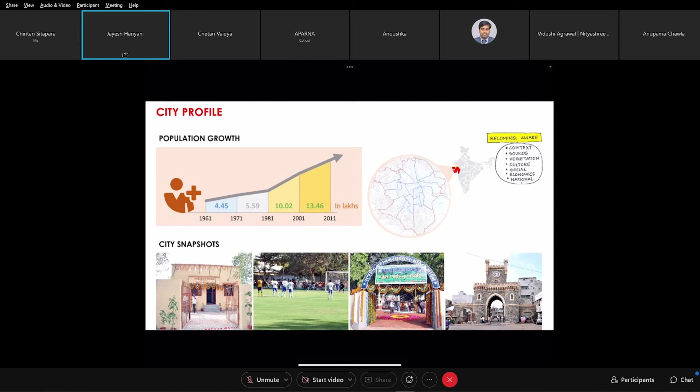Population. So part of the seeking is that you really want to understand a lot of things about the city, people, surrounding, infrastructure, culture, the history, background, and so forth. I won't really describe everything, but the population growth and becoming aware of the context, as I said from my diagram, city profile, becoming aware of all of the physical side and social side of the city as the current situation

that the city offers. I won't read everything, but I think most of you with a planning background go through this discovery or research prior to going into the planning process. So solid waste, wastewater, safety issues, open space, employment generation, energy consumption, slum and affordable housing, cultural aspects, and transport and healthcare, and so forth.

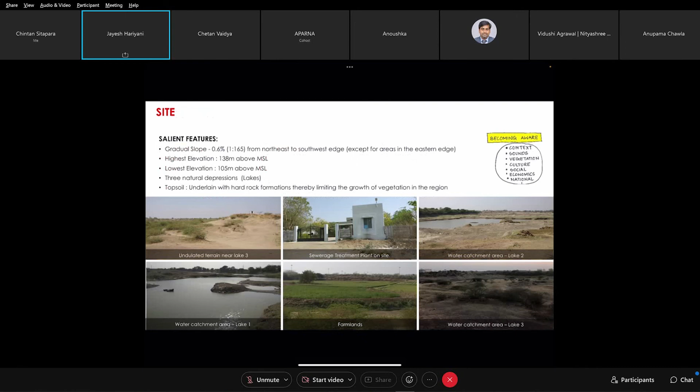Some of the salient features of the site: a relatively very flat site. I'm talking about the ABD area that was offered. Now, in terms of the urban growth throughout the years, mapping those from 1991 to the current date, and in terms of population, working population, household size, and literacy rate, and so forth. So the process of seeking continues as the starting point.

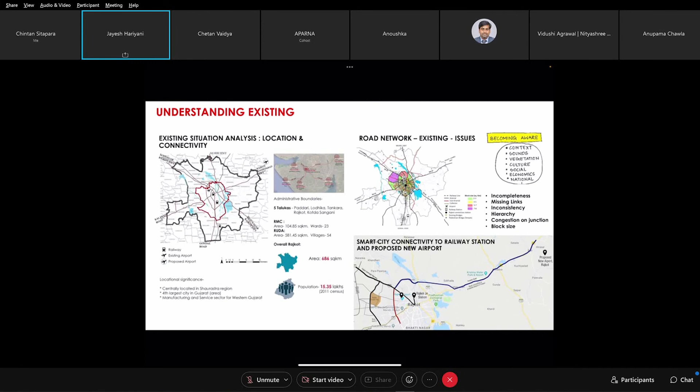Understanding of existing in terms of the road network, what issues are there, what the bottlenecks are, area of the city, and how it really grows into which direction, and so forth. So this continues, as I said, understanding of existing, a lot of that. And then once you start looking at all this data, it helps you to understand the framework, what happened and why it happened and where it's going and why it's going, and whether it's right or there needs to be some alignment to steer it in the right direction.

So looking at the network, whether it's a transportation network or a green network, you then start thinking about what potential it can have, look at different options and iterations and scenarios, fast forward scenarios. So we start parallelly towards the end of the seeking process.

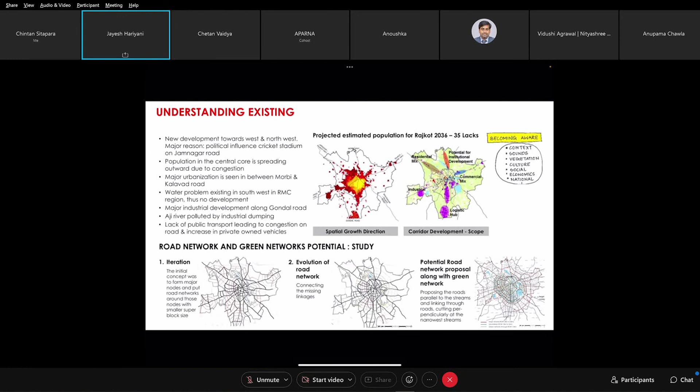Then the city already has a development plan, so you look at what goes in and why it was done and so forth, and in the context of fast forward for the city, in terms of the current GDCR and how they are really helping or not helping or need tweaking. So you look at a lot of these aspects parallel to site analysis. And I'll talk in more detail about why this site and what went into it.

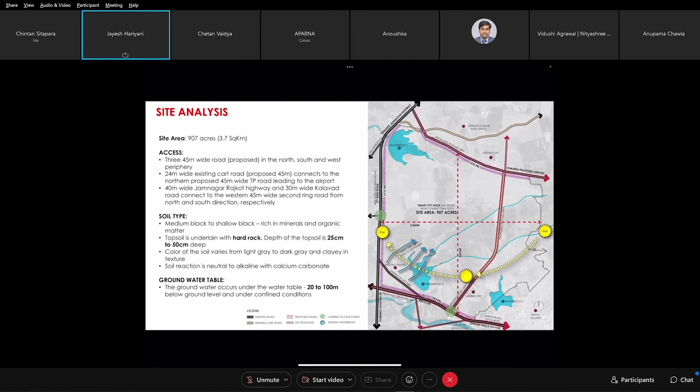So some physical aspects of access to the site: as you can see, the 45-meter road, which is a second ring road. Along this ring road, this site was selected, and soil types and groundwater tables and so forth.

Then we start the stakeholders process and citizens engagement. Total participation in this engagement was about 9 lakh out of the total population. So 70% of the total population participated in the engagement of framing what their smart city aspirations are. In this, a lot of programs and events were organized in terms of citizens' participation, in terms of inclusion, deliberation, refinement, and feedback loop.

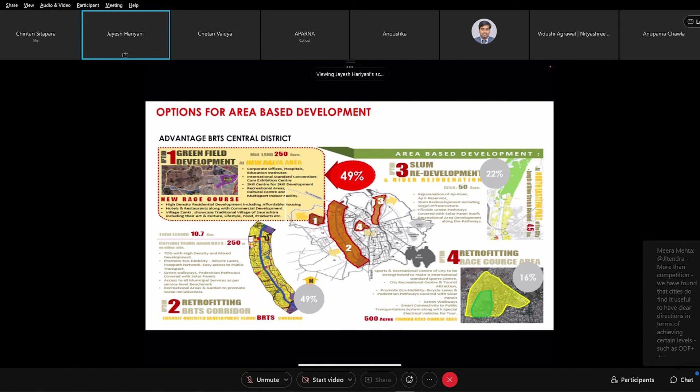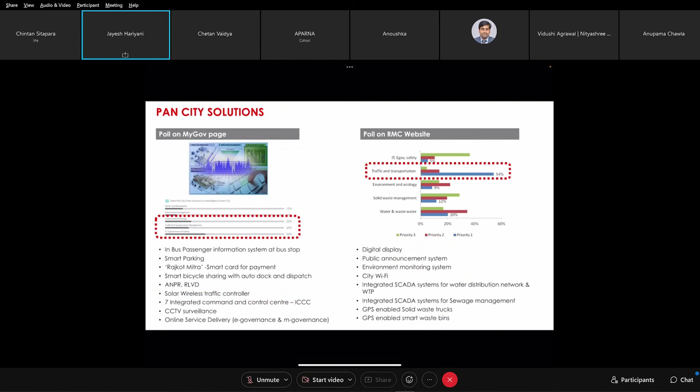And during the poll, the highest voting was the city wants to really go about area-based development. So that was the sure outcome, that maximum vote was given to the greenfield development, while some of the pan city initiative, some of the pan city focus area, was also happening. So both things had to go in parallel.

Today, I'm going to focus quickly on a case study of the area-based development, and how do we really leverage current BRT investment and extend it to the ABD area as part of the smart city initiative. So, looking at the regional level, more economic and social impact, how ABD development could contribute to the affordable housing, reinforcing the city's positioning at regional level in terms of recreation and tourism and sports was the aspiration. Then traffic decongestion, as well as grow the business and industry and offer new employment opportunities.

So four areas, as I said, for the ABD district, and design considerations were coming straight out from the citizen consultation, and what design strategies would guide this entire smart city master plan. Site, as I said, and the planning themes were regional level recreation and tourism nodes, and space for organized economic activities with business park and convention and exhibition center.

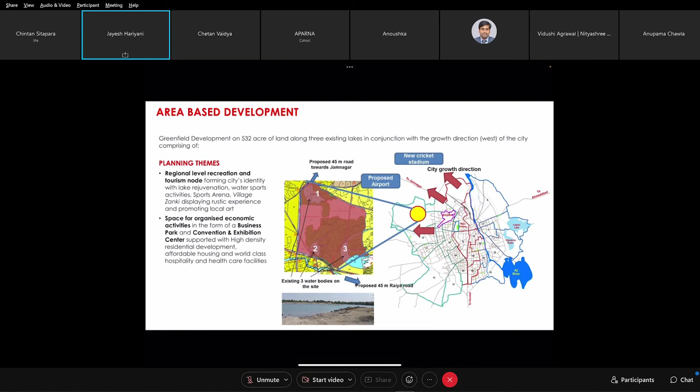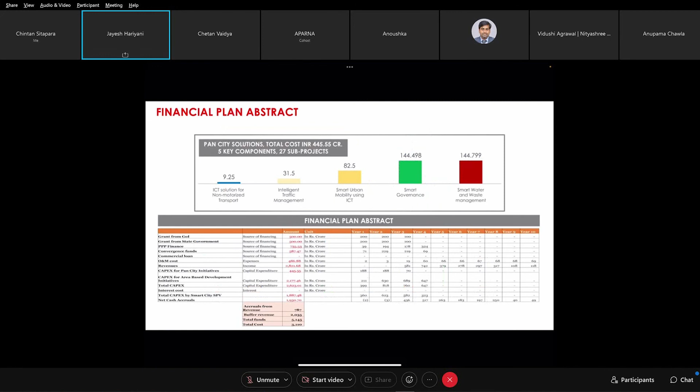Then we worked on SPV, which is already established, the initial funding and financial requirements for the stage one implementation. Overall, about 2,600 crores of total project funding was planned, and how to really acquire those funds in terms of center contribution, state contribution, ULBs, convergence, and PPP and infra development income. So from six different sources, this funding was secured. Financial plan abstract, I won't go into the details, but part of the scope included the framework of all this and guiding through.

Land optimization study is the key, which most of the Indian cities lack. So these are the quick case studies that most planning students go about, like, okay, Ahmedabad, if I take a 25 hectare snapshot of a few areas of Ahmedabad, and if I look at how efficiently land is used in terms of public realm, building footprint, and private open space, the way we have our development plans, the city regulations, and so forth, we have a system that really does not allow us to use the land, which is the scarce resource, in the most efficient way. So in the diagram, you see the red color. That's inefficiency in terms of land use.

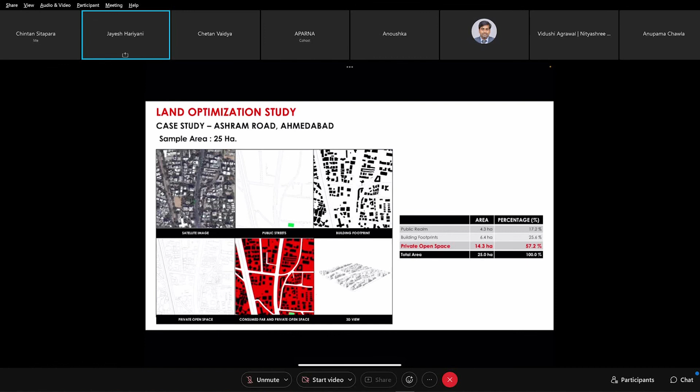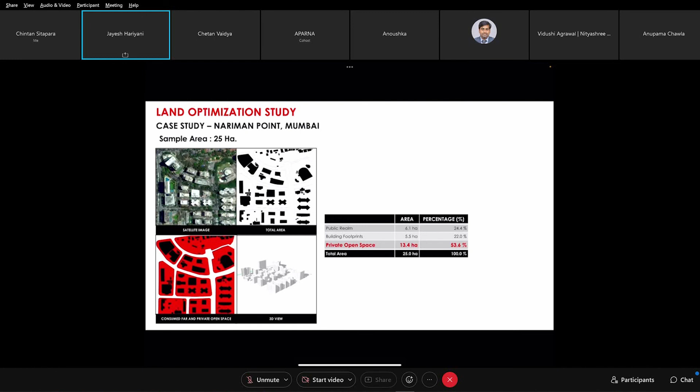About 57% of the overall land is not as efficiently used. Similarly, in another Indian city, a snapshot of Nariman Point, again red areas. Similarly, you can see private open spaces which are left as setbacks or as margins in the private lands are about 53%. Again, not a good way to utilize the scarce resource of land versus some of the other aspired cities, London and San Francisco.

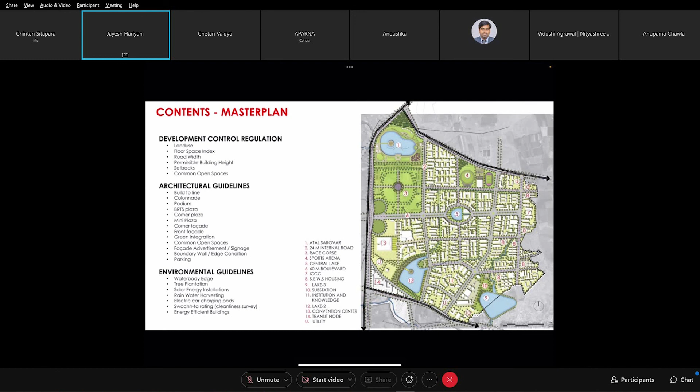And this is the content of the master plan. Part of that was tweaking the development control regulation, putting the new architectural guidelines to really guide the transformation and new environmental guidelines to transform the ABD area, and that can be filtered into the existing area as a next step. So this is the final diagram of the master plan of ABD area, existing site dimensions, as you can see.

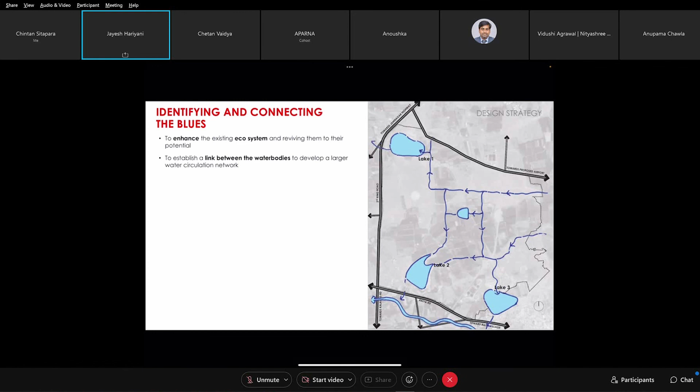The starting point was these few areas which were water bodies, and they were holding a lot of rainwater, storm water of the city catchment. And we said maybe this is a good opportunity to start looking at whether it can transform and guide our master plan. So we created a starting point to see if we can create this lake and convert it into a network of linkages. And then can we put green walkways and bicycle ways around this network? So that guides the entire pedestrian friendly and walkable new smart ABD city.

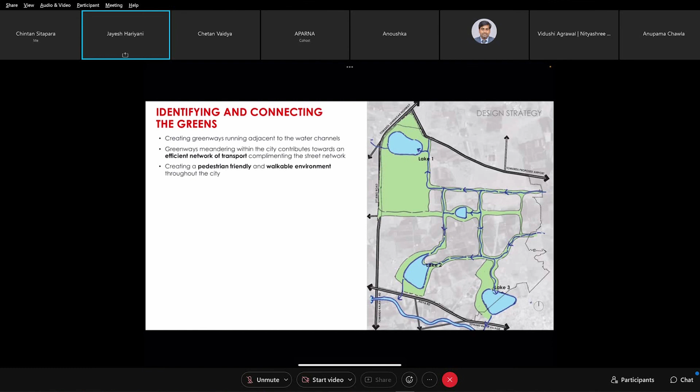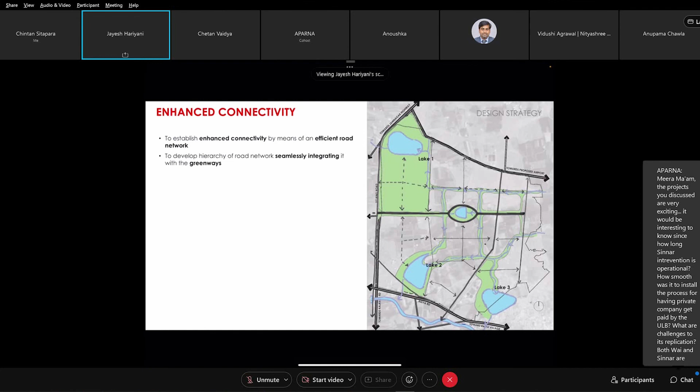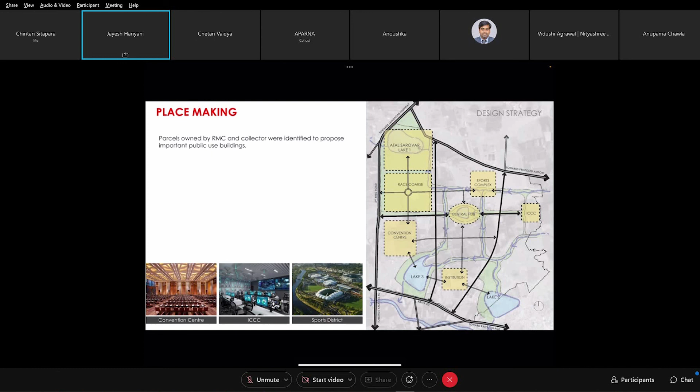Then we started looking at how we introduce the other connectivity and start going into block size and other transport network overlaying this green network. Then place making, as we all want in any urban area, we started looking at place making opportunities that really create smaller districts within the larger framework. So we started locating and looking at that, and that adds to the second level of the network.

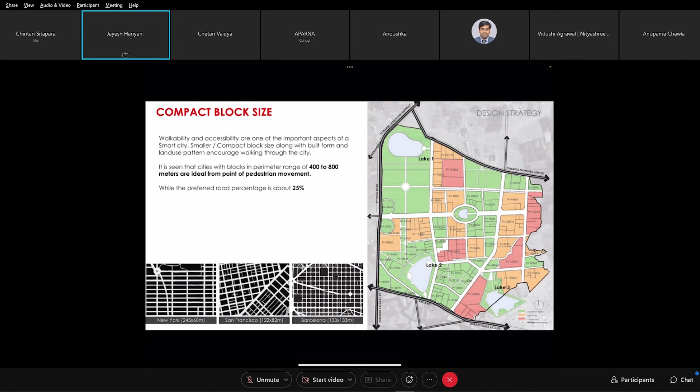And how do we go about creating a block size that is better in terms of connectivity and walkable circulation, and how do we create a block perimeter, which is what we need in most Indian cities. So we started modeling interconnected districts. Then the idea came up about these 6, 7 districts, whether it's a sports district, central district, convention district, recreational district, and the location of each was put so that, as the city grows on all three sides, some of the public realm can be shared spaces. So that's how we started looking into a district format.

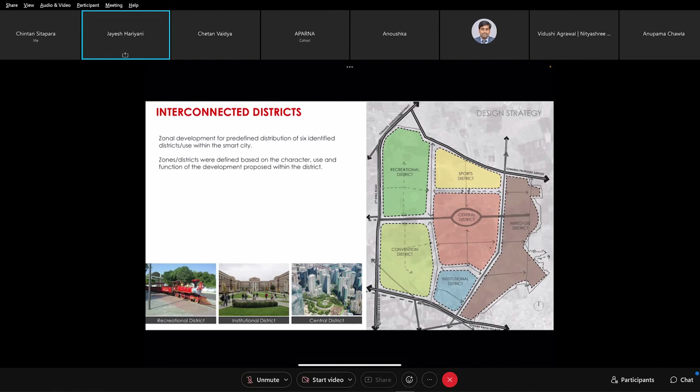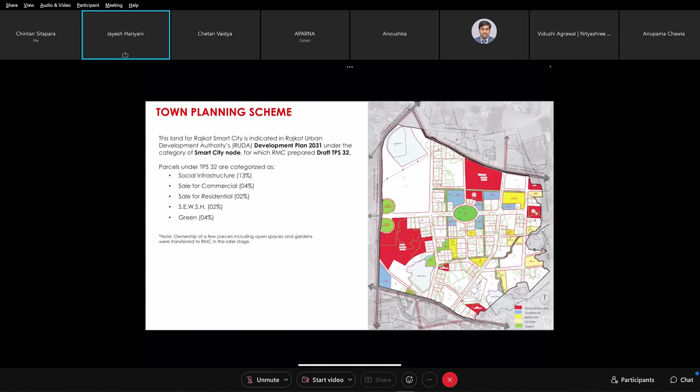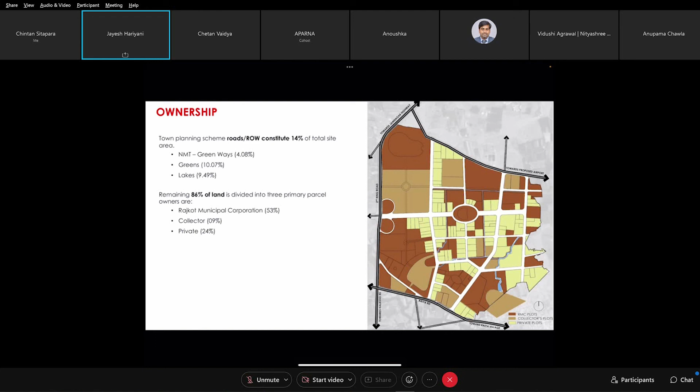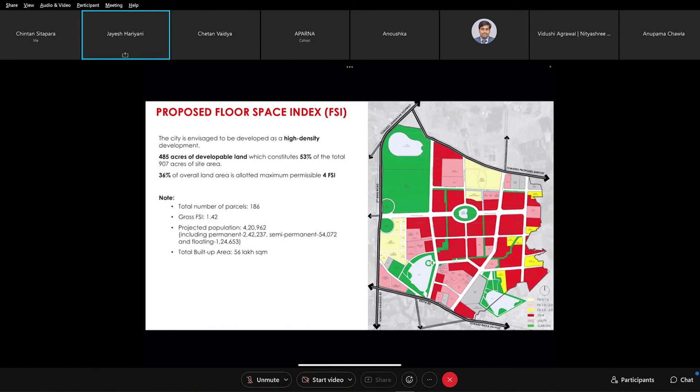And then we said we want to utilize this opportunity to offer maximum public realm as the other aspired cities offer, and still not compromise on the other side, which is ground coverage, which is economy, and FSI, which is again economy for the private owners. So how do we really create a win-win situation? We started running the model to maximize the potential. So for FSI parcels, maximizing those to create more compact and high density districts and leave more open spaces, more public realm. So we started defining those aspects, as you can see, and red are the 4 FSI areas.

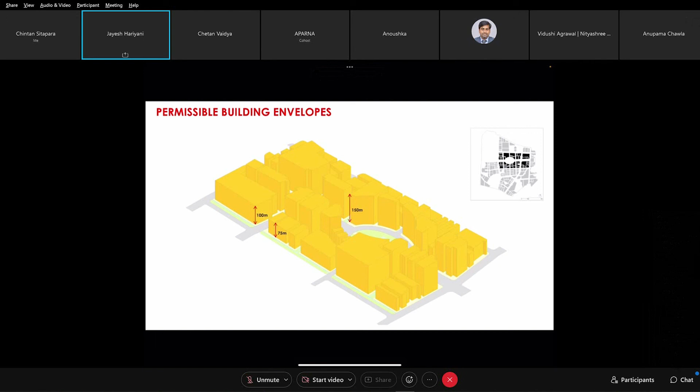And we did a block study, as you can see, of how the built form would emerge. And we want to make sure that the built forms really create wonderful urban enclosures. So maximum available heights were defined, 150, 100, 75, and then if you just maximize the ground coverage and build, how many floors you would need to consume all of the potential FSI available within the block.

The dark yellow color is what you would need to build to really consume all of the available FSI, but we provided more height and a potential form that can come out when all said and done could be something like that, offering a wonderful tight urban form with a lot of good block size to promote walkability and green open spaces. So this is what it could become.

So we looked at a lot of models. I did not include everything. Then the mapping, the green network along the water channels, connecting all of the water bodies.

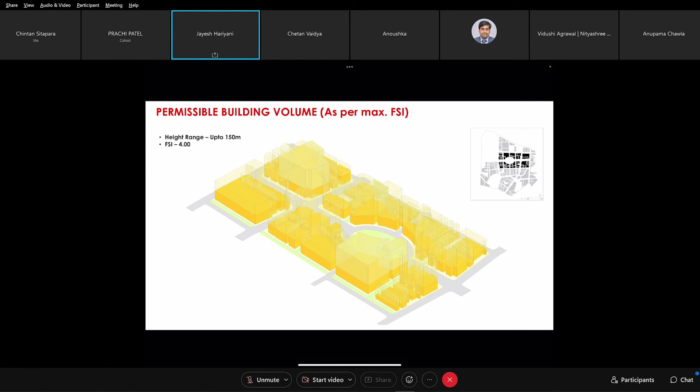Sorry? Hello? Excuse me, sir. Yeah. Not being able to see your presentation. Oh, is that right? Yes. Don't know. Maybe I got out of the presentation. Yes, sir. You have to reshare your screen. Okay. Okay. Is it coming now? Yes, sir. Okay. Sorry about that. I'm going fast. Just want to take you through the entire framework. So bear with me. You were able to see the last slides, right? No, sir. We are able to see the screen, but we can't see the presentation yet. Yes. Let me know. Actually, we are able to see. Okay. Is it okay now? Hello? Yes, yes. It is fine. Okay. Wonderful. You were able to see these slides, right? Yes, we saw all previous slides.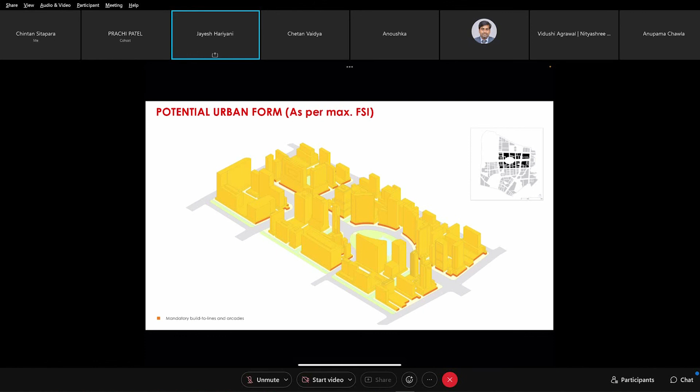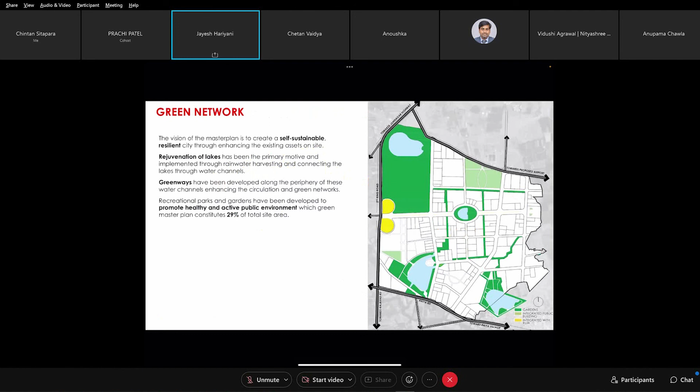Okay. Perfect. Now, part of the potential urban form, the dark orange at the bottom floor is the arcade that we introduce in the new guideline. So shaded walkable arcades across some of the corridors is what we introduce into the built form regulation. Then we started developing the green connectivity throughout the ABD city and what way public realm can establish some of the offerings as part of the transformative guidelines and main features.

So overall, 21 kilometers of road network, giving the right block sizes, about 850-meter perimeter of an average block size. Some blocks are smaller, but the maximum is 850-meter perimeter of a block size in this entire ABD area. 35% green open spaces, 22% circulation network, a lot of water rejuvenation features and canals were introduced. The FSI was also not compromised while providing all this public realm. A lot of sustainable and environmental guidelines were introduced in the overall ABD area. Again, robust infrastructure is planned and being executed as we speak.

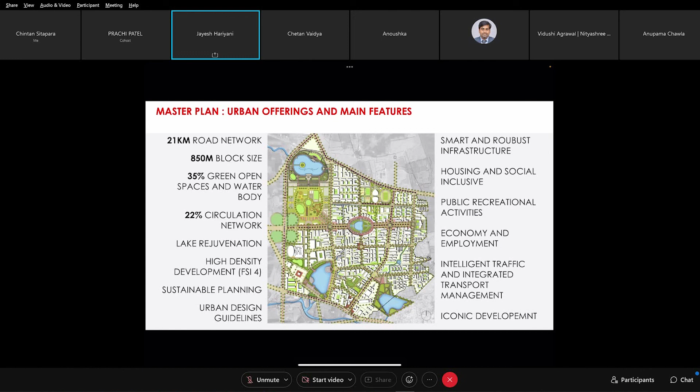Affordable housing was being catered for, a lot of employment opportunity and IT and other surveillance, transport, and other metering of all of the utilities were introduced. And some of the social aspects in terms of Atal Sarovar Central Park, business district, sport district, lake features, new race course, working women's hostels, health centers, skill development centers, sheltered home, and library and institutional were introduced.

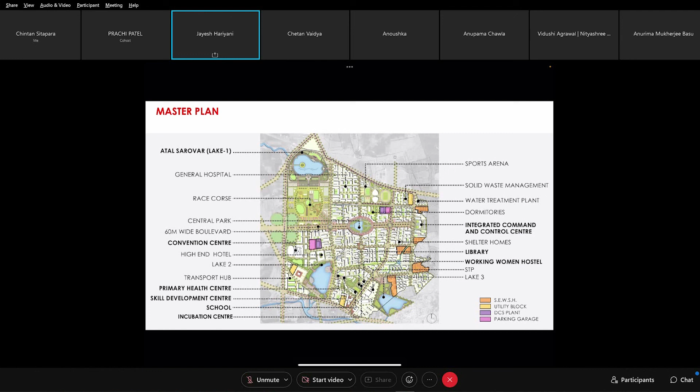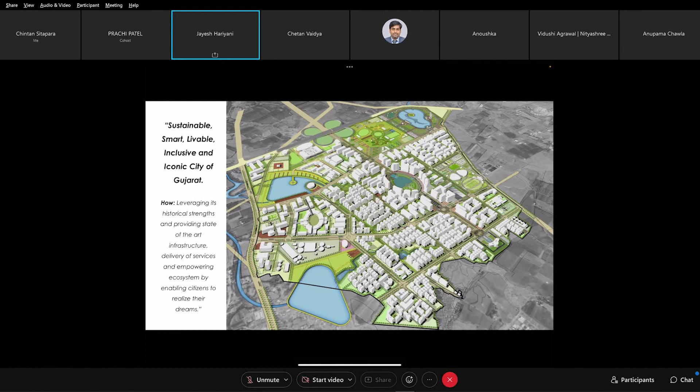So this was the final master plan when we put all of the amenities into the overall ABD area, where we have identified where some of these features will go as some of the phase 1 projects, and overall three-dimensional view in terms of densification and offering different built environment for the districts. And coming back to the aspirations of the city, that sustainable, smart, livable, inclusive, and iconic city of Gujarat framework, and how it leveraged the site features, their historical strength, and other potentials that they can unlock.

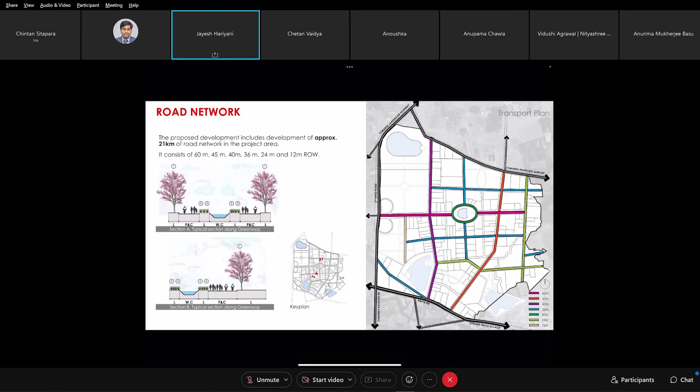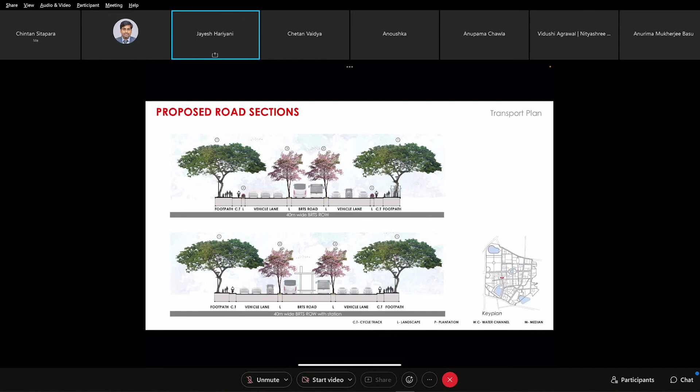In infrastructure, we brought the BRT connection all the way to this city, which is ABD city, and we created several scenarios. How do we bring the road network extensions overlap with ABD town planning and the DP plans, and started looking at hierarchy of some of the road network and cross sections with enough bike and pedestrian paths for each of these, from 60-meter right of way all the way to 12-meter right of way. We did a lot of iterations to make sure of maximizing public realm and more space for biking, shaded walkways, and so forth. As you can see, the BRT corridors were introduced within some of these to make more mobility-driven neighborhoods.

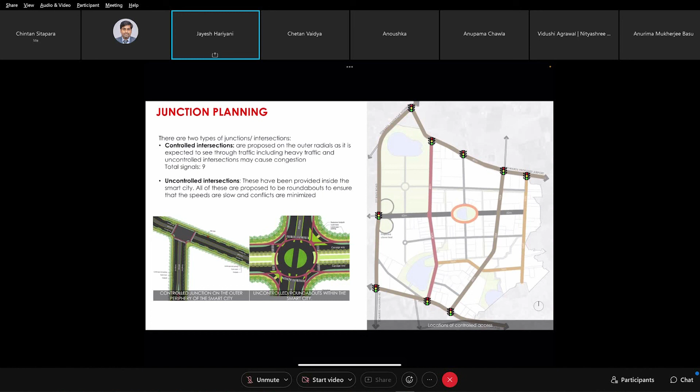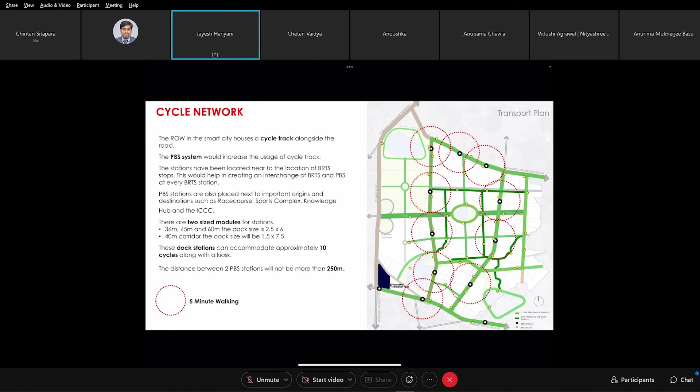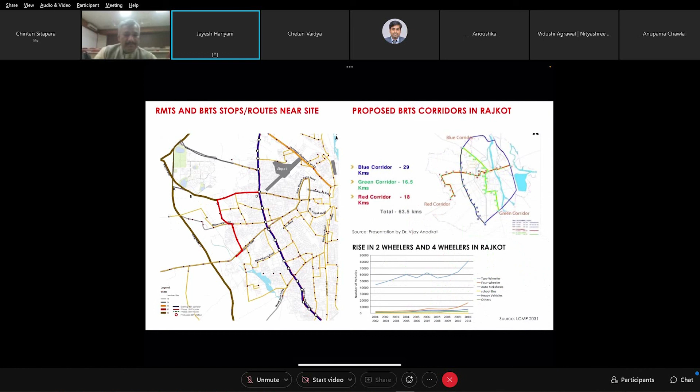Then two types of junctions we introduced: controlled intersections and uncontrolled intersections throughout this entire ABD city area, and introduced some of the services accordingly. The entire cycling network we mapped, and the circles are 5-minute walking distance circles. And the black dots you see are the BRT stops, and how they really provide 5-minute connectivity to most of the density in the smart city area. And again, a larger map on bringing the BRT network to the smart city area, which is being currently executed as we speak.

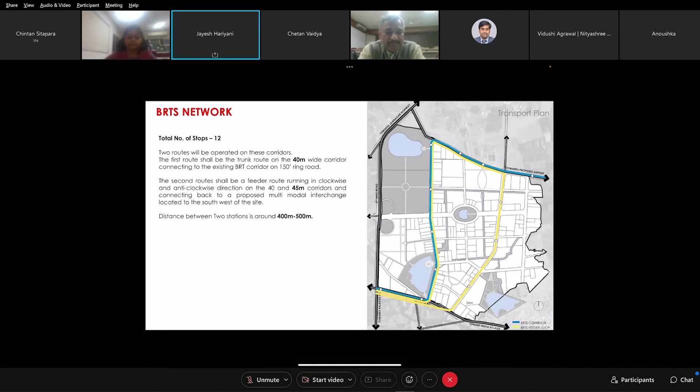So this is within the smart city area, the BRT loop and the stops. We have introduced two routes. One route is more a loop, and the other route is the feeder loop, and they both overlap. And our intermodal connect hub is also introduced, and the BRT is connected to that as well. Paratransit for auto rickshaws and other stands were also planned and introduced along the BRT route. Parking infrastructure is being nailed down.

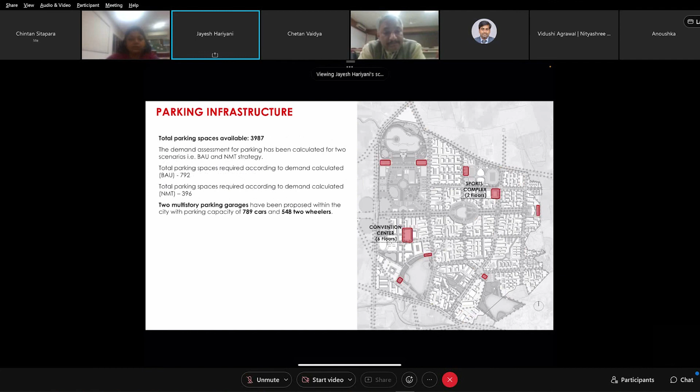Excuse me, sir. So, I'm sorry to interrupt. Actually, within a few minutes now, the 3 panel sessions will have to start, because we have our international guests who would be chairing these sessions. They are in different time zones. So I request you to kindly wrap up quickly. Yes. Just the last few slides.

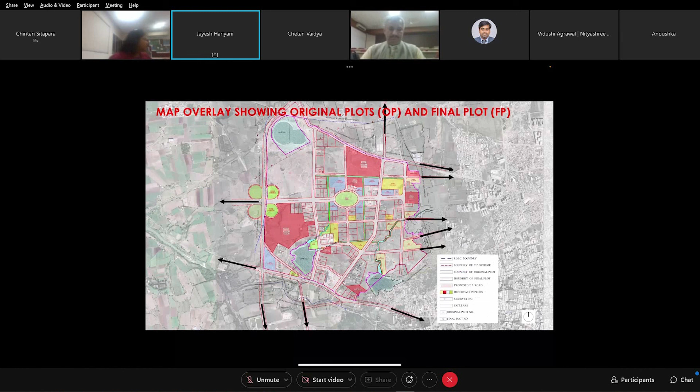This is what was the starting point. The magenta line is the site boundary and the land configuration. The map showing the original plots. Then starting transforming the city, smart city area, putting all of the elements and turning into potential of final plots and buildability. And this is the final TP map, overlaying local area plans and other amenities.

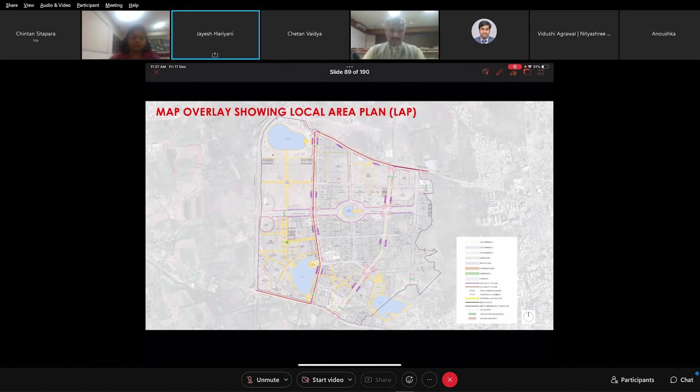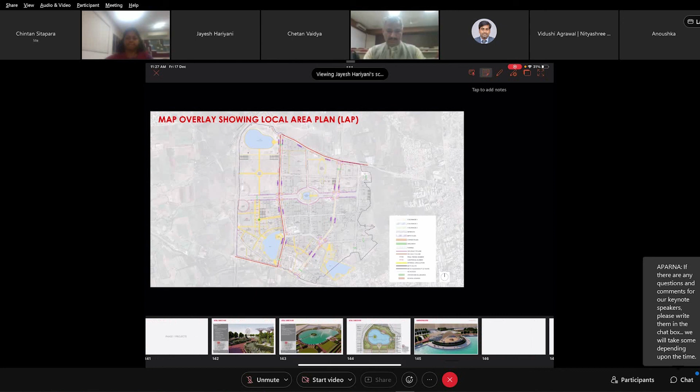And then I won't touch on each aspect of the infrastructure in the interest of the time. Let me see if I can just jump to the last ones. Okay, so phase one projects. I just skipped all of the robust infrastructure slides, and we look at the few

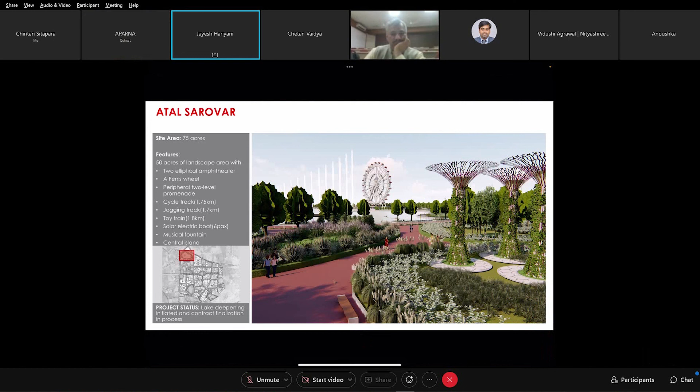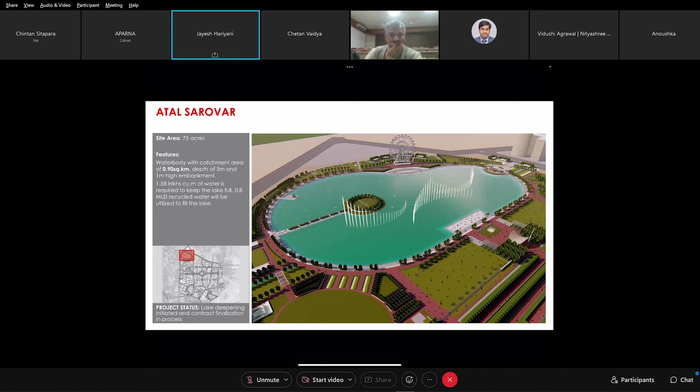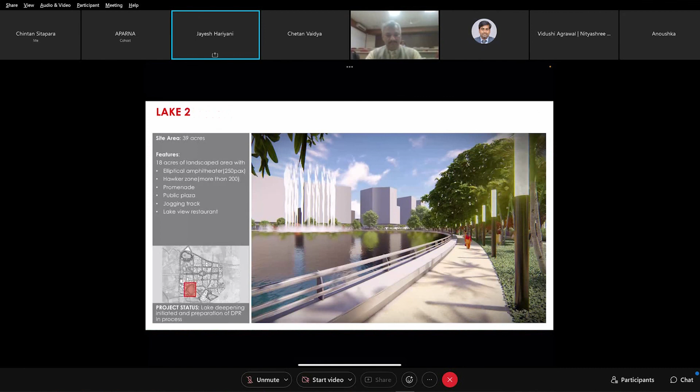initial phase one projects. This Atal Sarovar is one of the largest lakes, about 75 acres of a park and lake is being introduced for the city, which is under construction. This is overall amenities around this park and lake area. Some of the amphitheater areas, the plazas, the other parks, the island, Lake 2 features, which is 39 acres of a lake and parks. So a lot of public realm is being introduced as part of this.

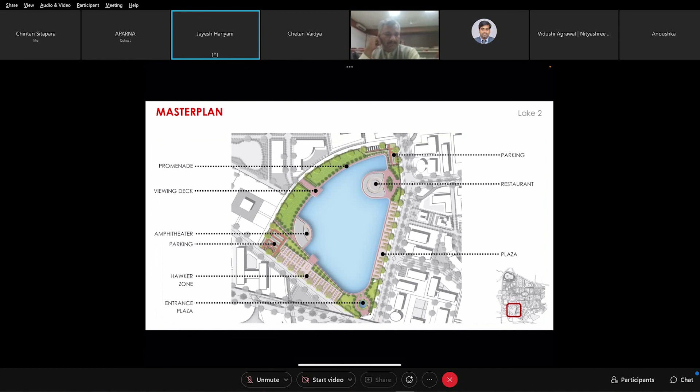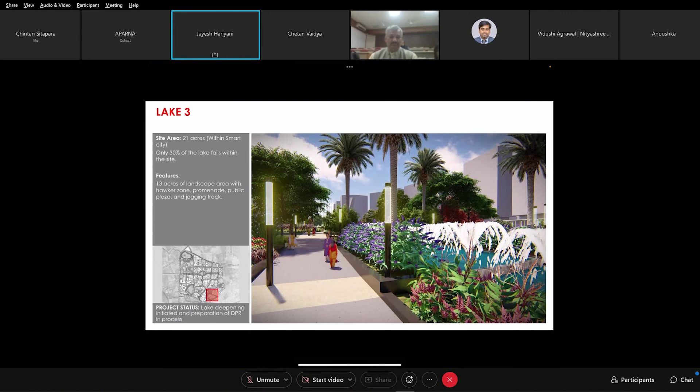A lot of vending and hawker zones being introduced into these areas. So each district will have enough hawker zones and informal market. Lot of artwork is being introduced as part of these and built into the guidelines. Lake 3, 21 acres of a park and lake. Again, other areas surrounding, and then the Central Park, another 11 acres of a public realm is being introduced. Then the Business Park and Convention District is being introduced in 18 acres.

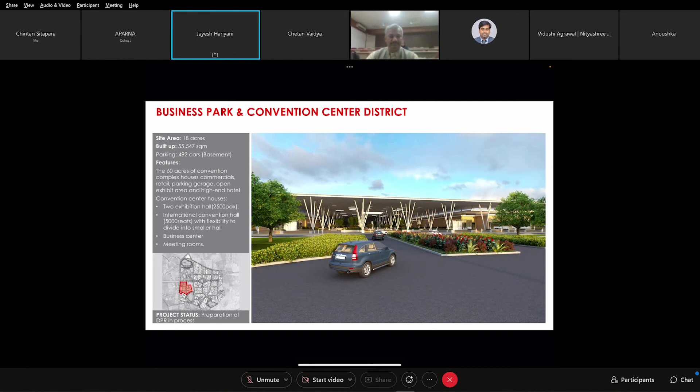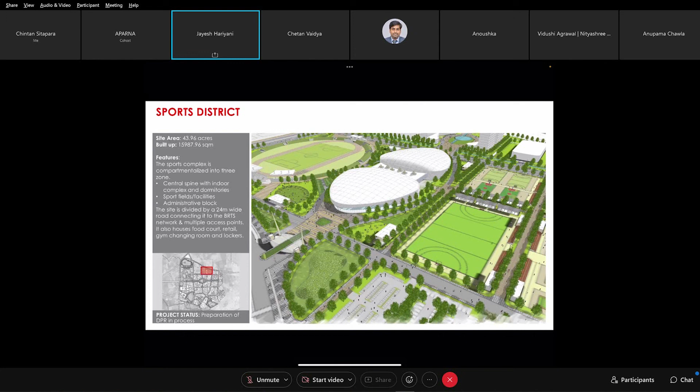Master plan and the network and infrastructure is being placed as we speak on site for this business park. Then the sport district of about 44 acres has been planned for the city at international level sports amenities. A lot of sports amenities have been introduced, and the master plan is developed at district level.

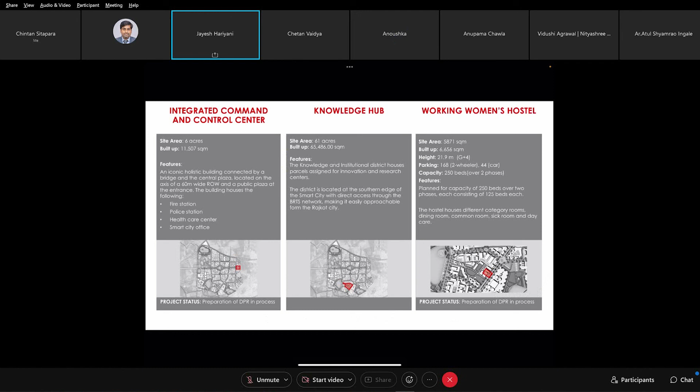Some other public realm and public projects, command center to measure the performance of each aspect of the city. Knowledge hub, working women's hostel is part of the proposal. The incubation center, library, skill development center. So a lot of these initial infrastructure projects have been proposed and being introduced as phase one budget.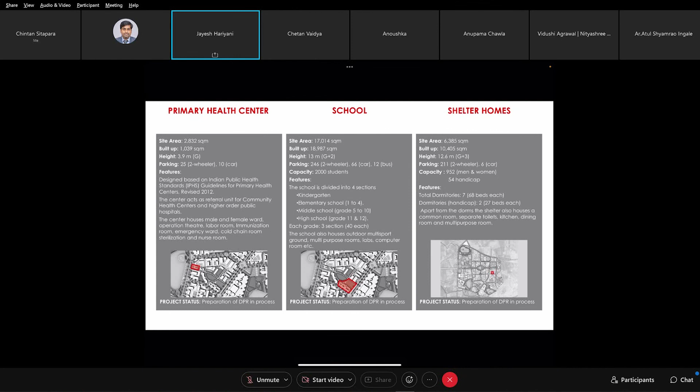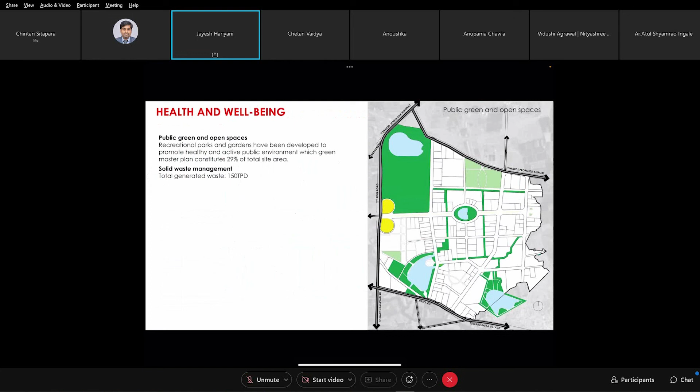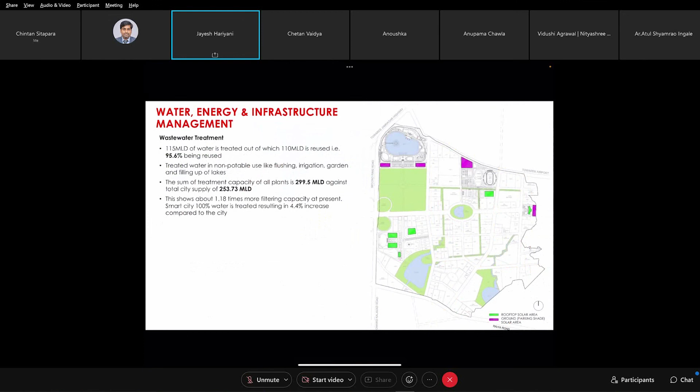Then this city is being ranked. I won't go into detail, but like shaded corridor for public walking and public park, mobility in terms of BRT as well as the bicycle path, and is being introduced in terms of water efficiency and infrastructure efficiency. So a lot of green features have already been designed and are currently being built.

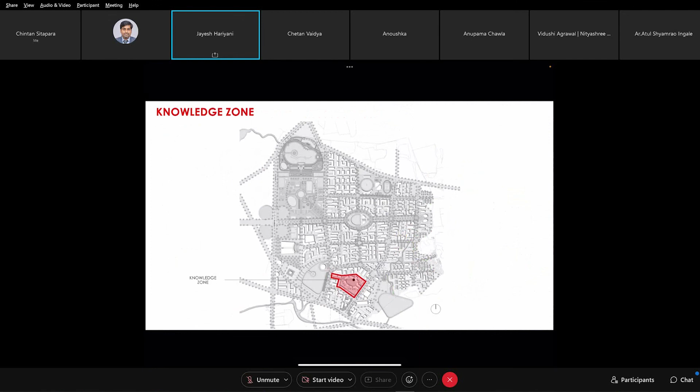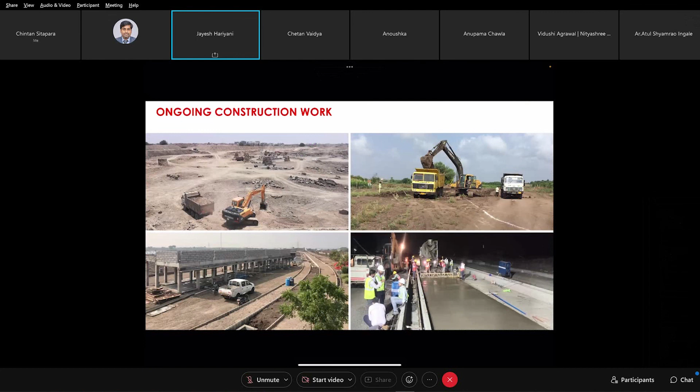Knowledge zone, and this is current Google map where the infrastructure is being put in place. As you can see, L&T is executing this project in a phased manner. Some of the site pictures, and this is the current state of the construction ongoing. And the entire effort has been recognized as the first platinum level green smart city of this scale at India level. So recently the city was awarded as a platinum smart city initiative.

Last slide. So through the process of framework of sustainability, becoming aware through seeking, connect with big transformation is what I showed with a case study. Thank you all.

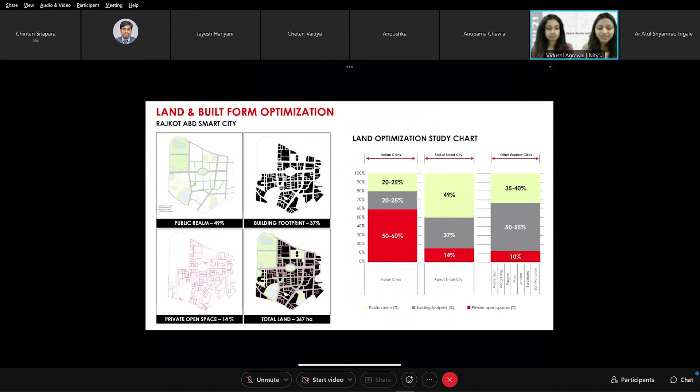Thank you so much, sir. I believe what we resonated with most in your presentation was when you said that without an appropriate spirituality, even the idea of sustainability is unsustainable. It was very interesting to see a project come together from scratch, and we thank you for being here today.